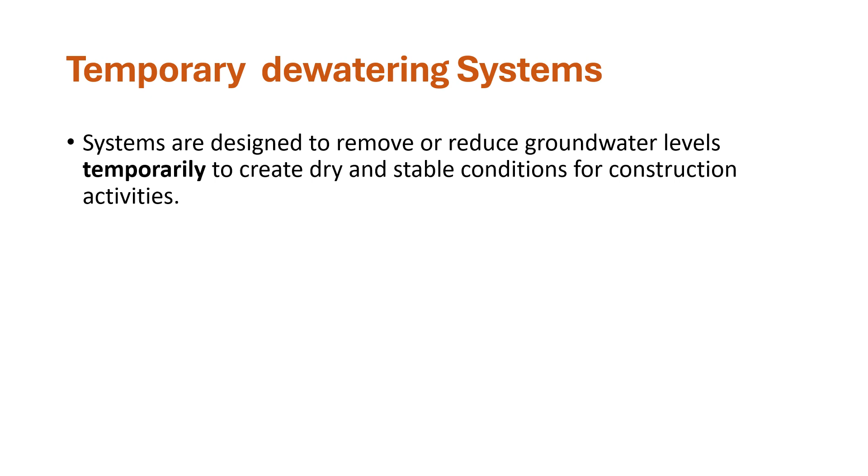What do we mean by temporary dewatering techniques or systems? These systems are designed to remove or reduce groundwater levels temporarily in order to create stable and dry soil conditions suitable for construction activities. They are typically employed during the excavation and foundation phases of the project. Once those phases are finalized, the systems are deactivated and removed.

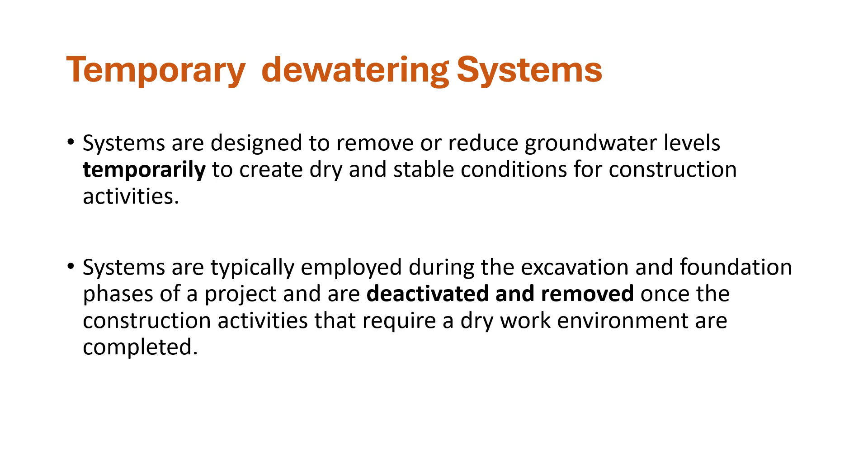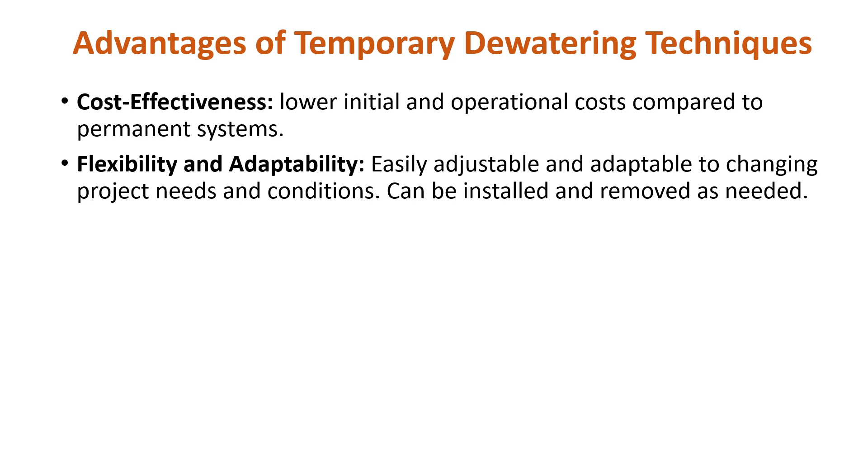Why do we use temporary dewatering systems? First, they are cost effective, with lower initial and operational costs compared to permanent systems. They are flexible, easy to adjust and adapt when project needs change, and can be easily installed and removed whenever needed.

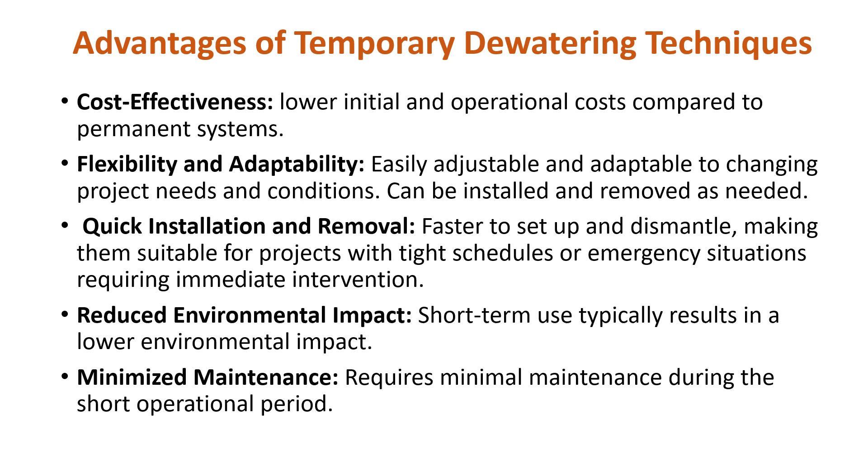They can be installed and removed quickly, so they are suitable for projects with tight schedules where the duration is fixed with no flexibility to extend, or for emergency situations needing immediate intervention. They have a reduced environmental impact because they are short in duration compared to permanent dewatering systems, and they require minimal maintenance during the operation period.

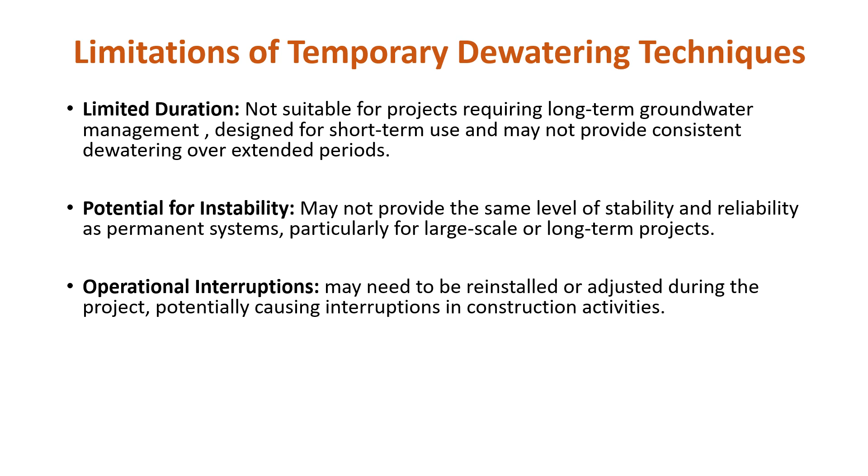What are the limitations of such systems? First, they have limited duration, so they are not suitable for projects that need long-term groundwater management. They have potential instability and are not able to provide the same level of stability as permanent systems, particularly for large-scale projects. They may also suffer from operational interruptions, such as installation and reinstallation.

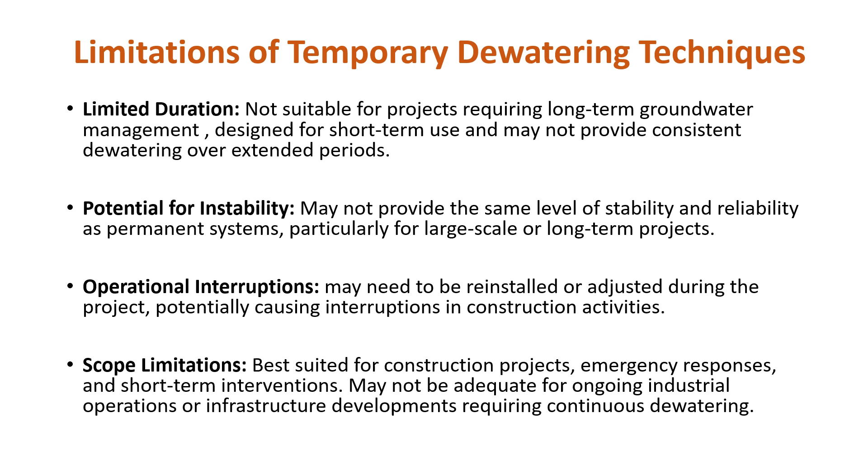They are not suitable for every type of project, so their scope is limited. They are best suited for construction projects, emergency responses, and short-term interventions.

What are the types of dewatering systems we are going to cover here? We have well points, sump pumping, deep wells, eductor systems, and vacuum wells. Let's start with the well points.

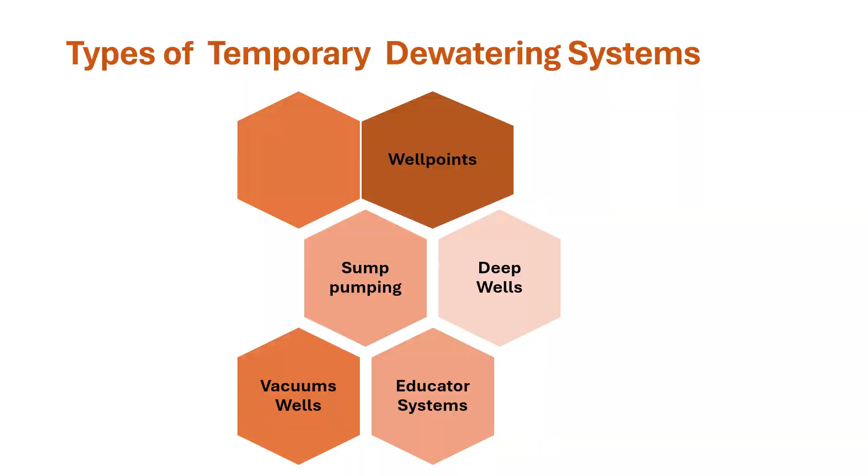About their components: well points are formed of small diameter wells installed in series along the perimeter of the excavation. They have a header pipe that connects the well points together and transports the extracted water to a discharge point. There is also a vacuum pump that creates suction to draw groundwater through the well point and into the header pipe.

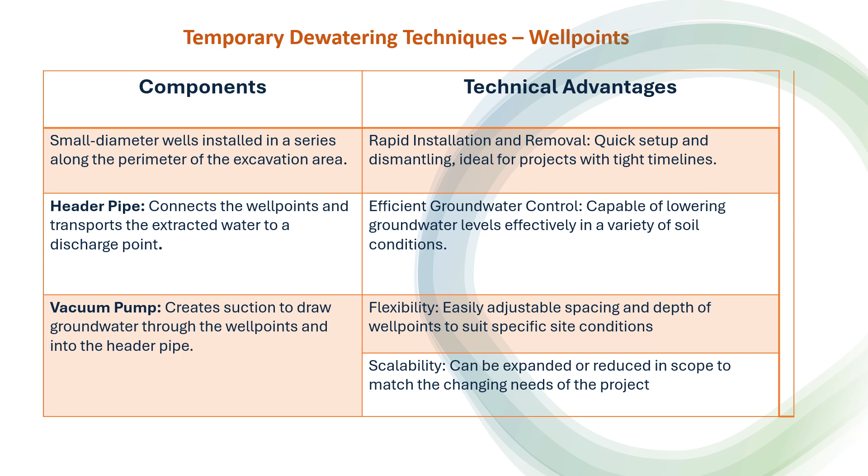What are the applications? We can apply well point systems for excavations used for foundations, basements, and trenches, for utility installation and repair, and also for temporary stabilization of slopes and embankments.

Well points can be applied for systems with a limited depth, effective for depths between 5 and 6 meters. If you have a deep excavation, they are not applicable. They also need continuous power supply and regular maintenance.

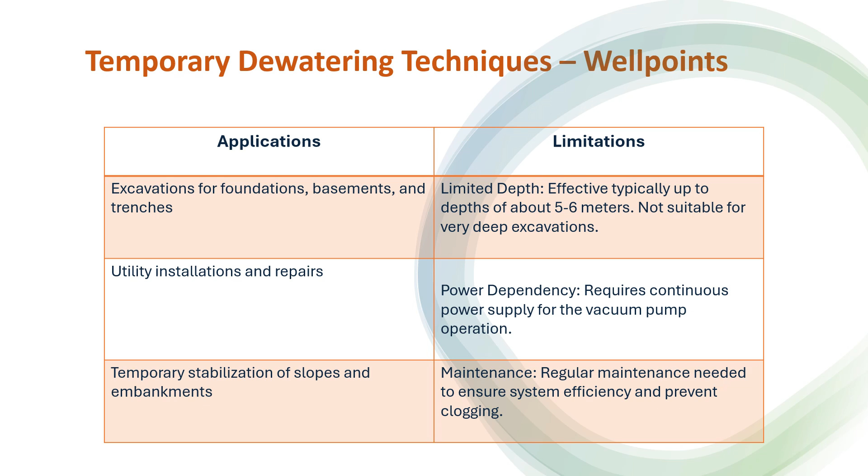The third type is sump pumping. The sump pump system is formed of a sump pit, which is excavated at the lowest point of the site where water needs to be collected, a submersible pump, and a discharge pipe.

Sump pumping is suitable because it is simple and low cost. It can be easily installed and is cost effective for short-term dewatering. It can be quickly adapted for variable site conditions, with water removed rapidly, and is able to remove large volumes of water, particularly in areas with high rainfall or groundwater inflow.

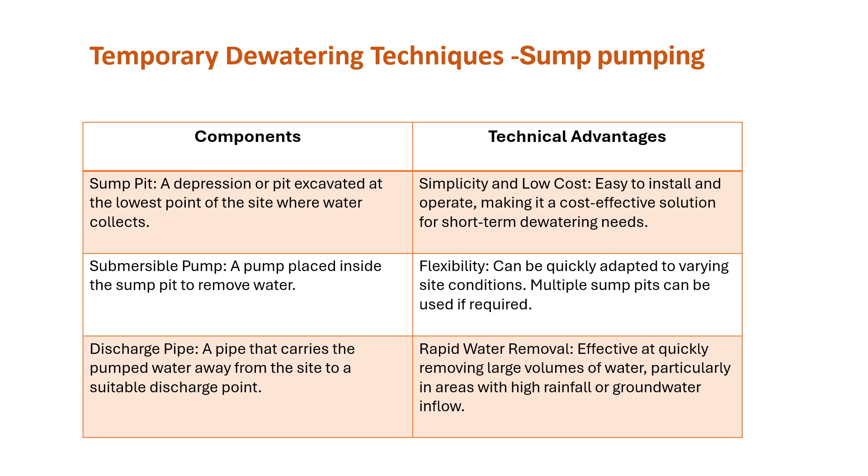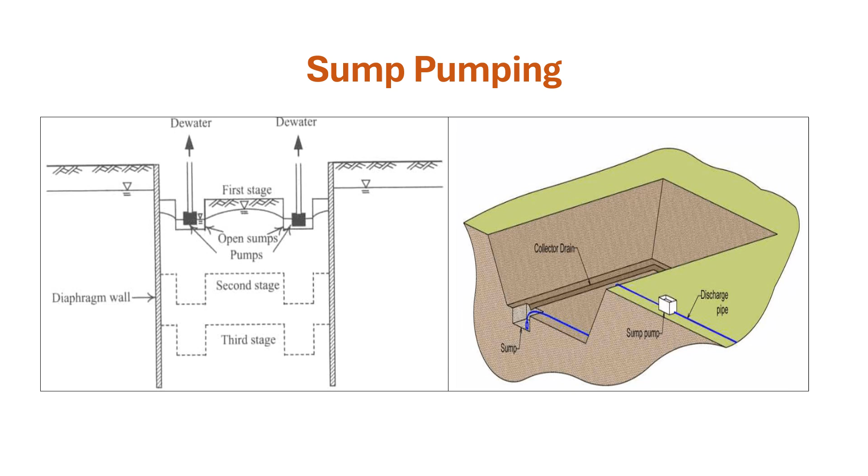This figure shows clearly how the sump pumping system is formed. It is a very simple system: this is the sump at the lowest point of the excavation, this is the sump pump, and this is the discharge pipe.

Sump pumping can be applied in excavations for foundations, basements, and trenches, in projects that need emergency dewatering where there is unexpected water inflow, and for utility installation and repair.

What are the limitations of such systems? First, the effective depth is limited to shallow excavations. If you have deeper excavations, keep in mind that the efficiency of the dewatering system will decrease.

Sump pumping systems may cause soil erosion due to the high flow rates of water. They require regular monitoring and maintenance, and should be managed to prevent environmental contamination.

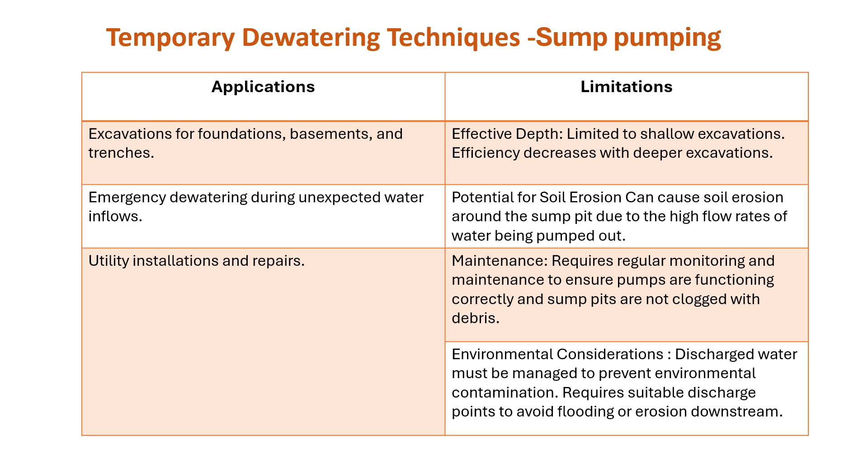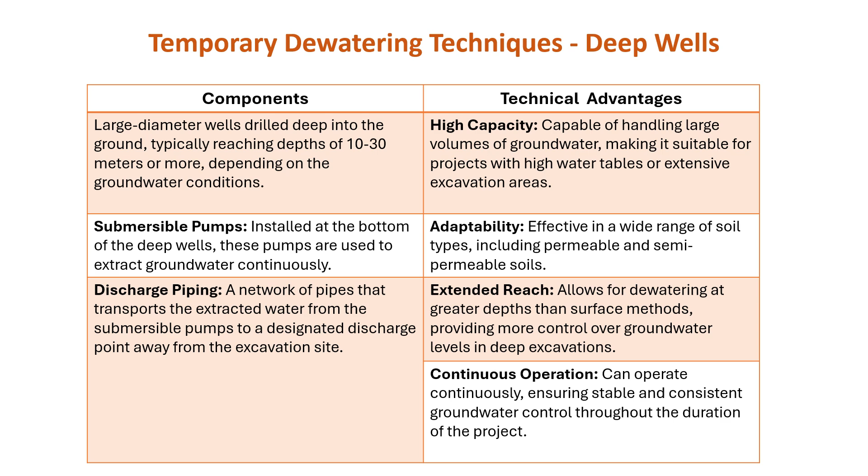The fourth type is the deep wells. Deep wells are large diameter wells drilled to depths between 10 to 30 meters or more. They are formed of submersible pumps and discharge pipes. They are suitable for projects with high capacity of groundwater. They can be effective in a wide range of soil types, whether permeable or semi-permeable. They allow dewatering at greater depth than surface methods and can operate continuously, ensuring stable and consistent groundwater control throughout the project.

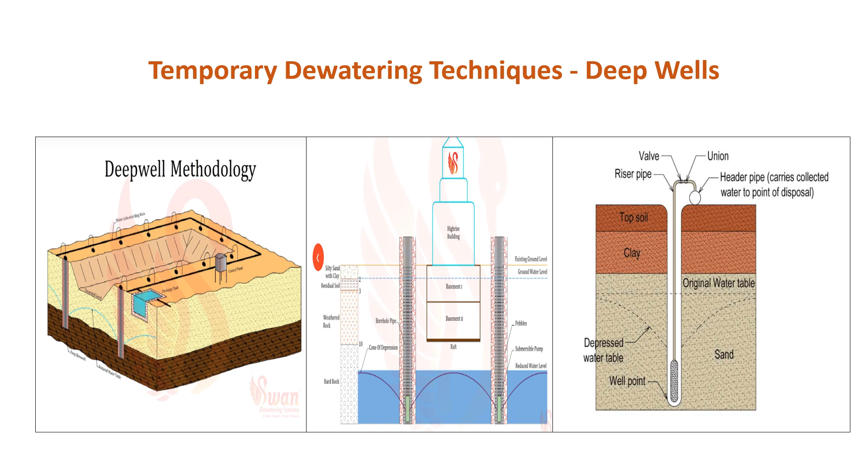Where to apply or use these deep wells? We can use them in large-scale excavations. They are suitable for marine construction where there are large quantities of water in coastal or offshore construction projects near the coast. Underground infrastructure projects are also very useful applications.

But what are the limitations of such systems? First, they have a high initial cost. They depend on continuous power supply to operate, and they need regular maintenance on pumps and piping. Their installation is not easy at all; it is a complex and time-consuming system compared to surface dewatering methods.

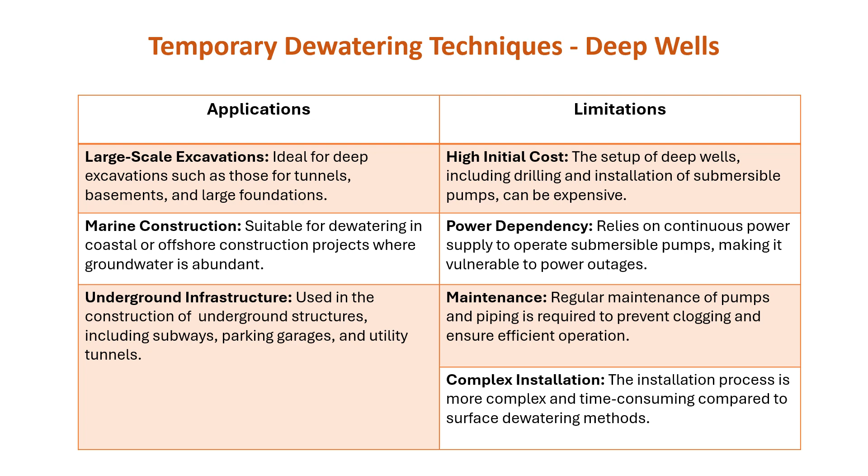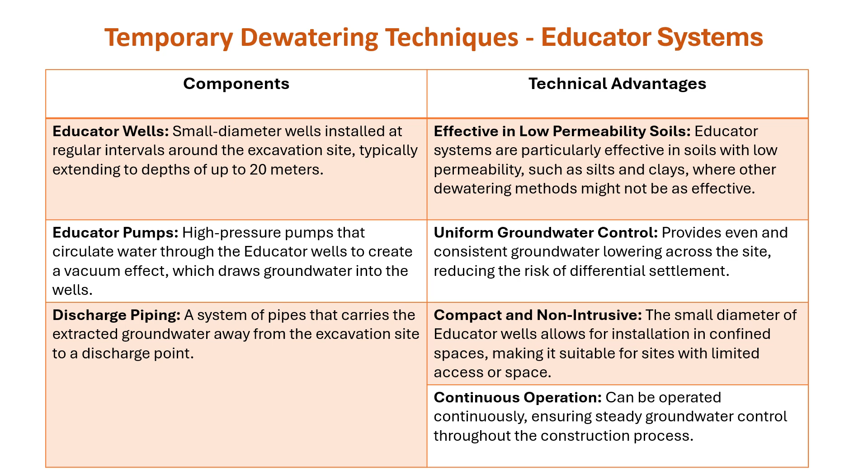Away from our site. What are the technical advantages? First, eductor systems are very effective if your soil has low permeability, such as silts and clays. They can control the groundwater in a uniform manner, which reduces the risk of differential settlement. The small diameter of the eductor wells allows for installation in confined spaces, making it suitable for sites with limited access or space. It can ensure continuous operation, ensuring steady groundwater control throughout the construction process.

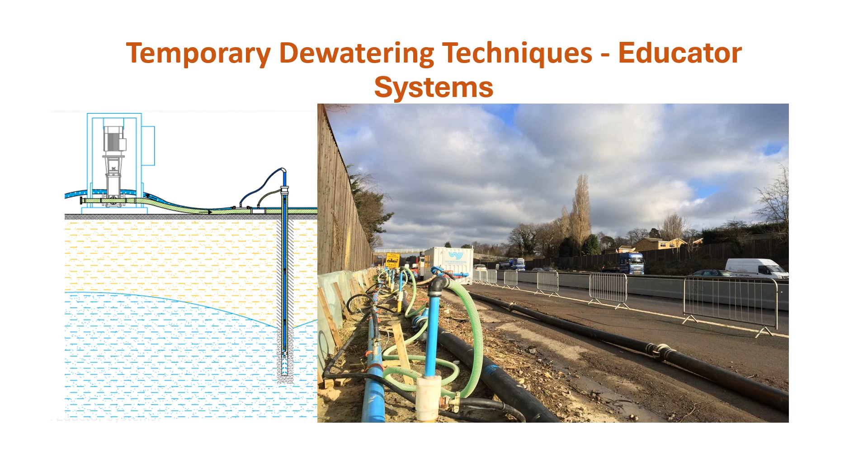This is the diagram that shows how the eductor system is installed. This system can be applied in deep excavations with low permeability soils. It is useful for underground structures such as tunnels and underground facilities, and for urban construction sites where space constraints and the presence of sensitive structures require precise groundwater control.

But you have to keep in mind that this system needs high power and energy consumption, which leads to high initial setup costs. The maintenance is not easy, it's complicated, and it is efficient for moderate depth. Eductor systems may be less efficient in very deep excavations compared to deep wells, meaning if you have very deep excavations, it's better to go for deep wells instead of eductor systems.

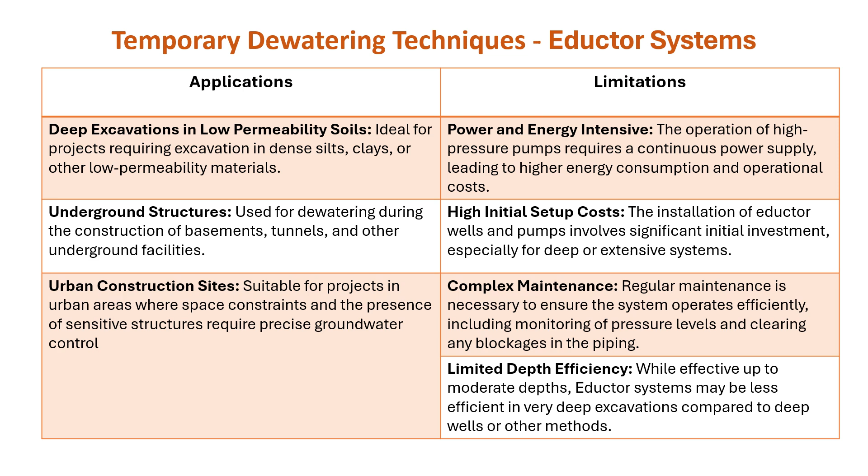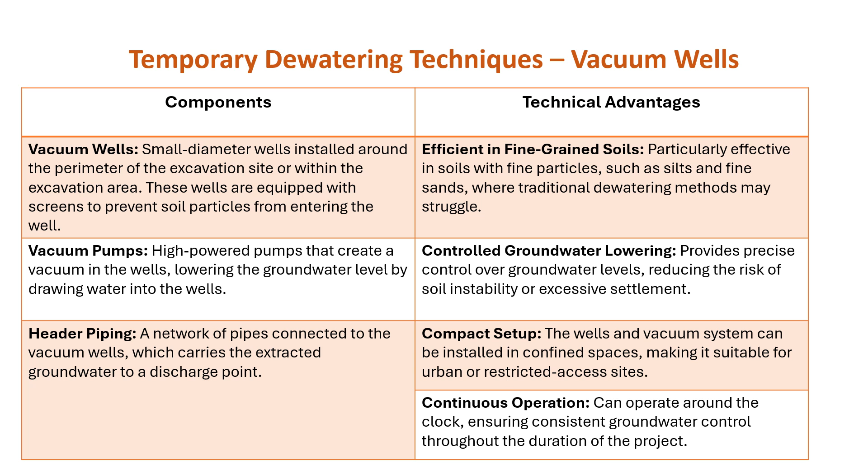Their applications: they are useful in excavations of fine grain soils, for underground construction projects, and for urban development projects.

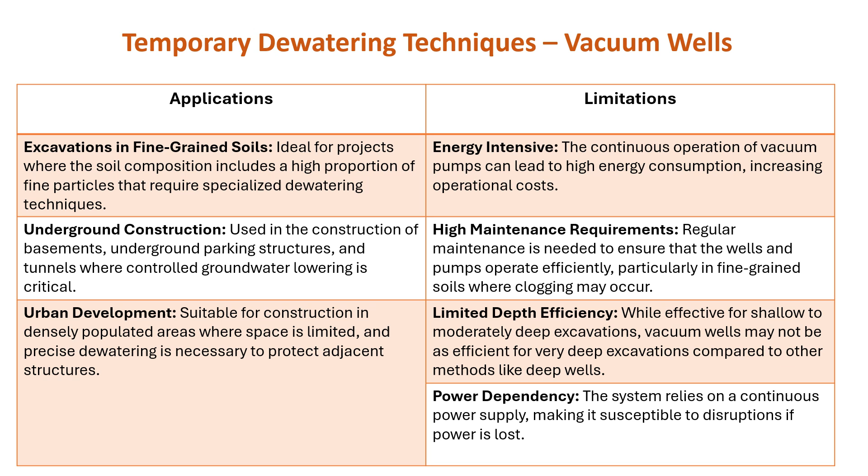However, what are the advantages or limitations of such systems? First, they are energy intensive, needing high energy consumption, which increases operational costs. They need high maintenance requirements and are suitable for limited depth. Also, power dependency is one of their limitations because they rely on continuous power supply, making it susceptible to disruptions if the power is lost.

Thank you so much, this is the end of part 2 of our lecture. In the third part, I'm going to discuss all types of permanent dewatering systems.